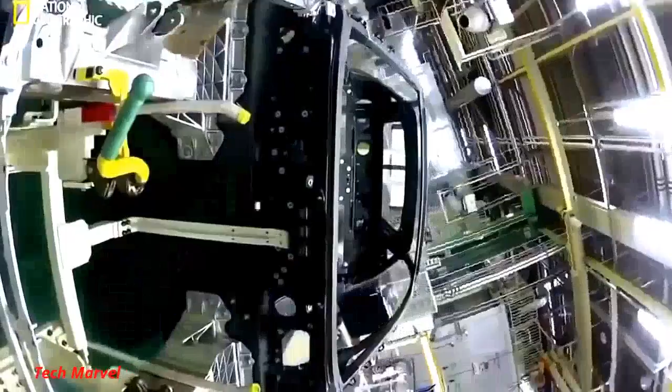In a top-secret megafactory, a car like no other is taking shape. Craftsmen hand-build what they consider an automotive work of art. Money is no object—this machine must redefine a billion-dollar brand. Failure is not an option.

Japanese marque Lexus sells itself on luxury, marketing its cars as elegant, quiet, high-tech, and efficient. Now, a different kind of car wears the Lexus badge, the LFA—aggressive, loud, agile, with the highest revving V10 engine in a production car, reaching 325 kilometers per hour. A car like nothing Lexus has ever produced before.

Lexus is just over 20 years old. The world's largest car maker, Toyota, created the brand to compete with other high-flying luxury marques: Mercedes-Benz, BMW, and Jaguar. It's worked—Lexus is now one of the biggest-selling high-end marques in the United States. But now, Lexus is out to inject more excitement into their brand.

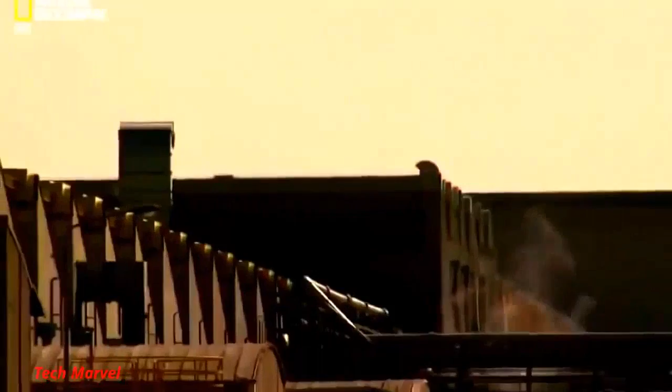The company transformed two unassuming blocks of this megafactory to create the LFA. They then scoured Toyota's 50,000-strong Japanese workforce to handpick just 175.

All the associates here at the LFA Works feel they are artisans, not just operators. These artisans are known as takumi, Japanese for craftsmen, a status only conferred on the most highly trained, skilled workers. Each and every associate at the LFA Works is seeking to achieve perfection, taking this challenge on with a sort of samurai spirit.

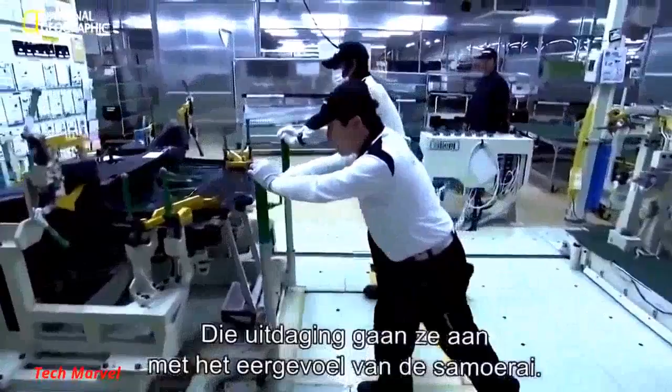Yamanaka Shigeru is manager of the LFA Works. His teamwork credentials come from another time-honored Japanese tradition: baseball. Before this, I was working as manager of the Toyota Motor Corporation baseball team, which brought people together from lots of different backgrounds. It was because I could manage that organization that I've been made manager here.

To reach their goal, they're turning to sophisticated tools and materials to build the car. The most important of these is carbon fiber composite. Carbon is crucial to the car's performance—it's a material five times the strength of steel, yet a quarter the weight. It's the construction material of choice for both Formula One racing cars and the aerospace industry.

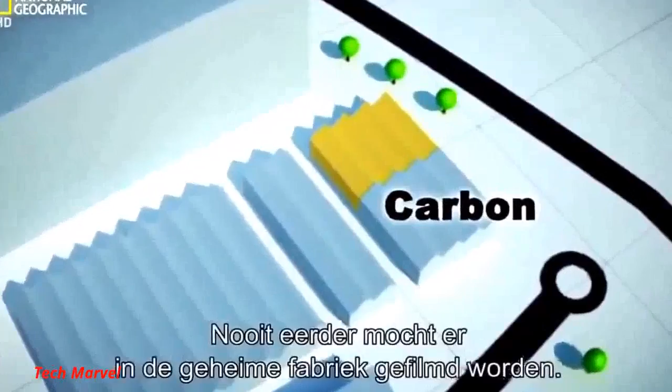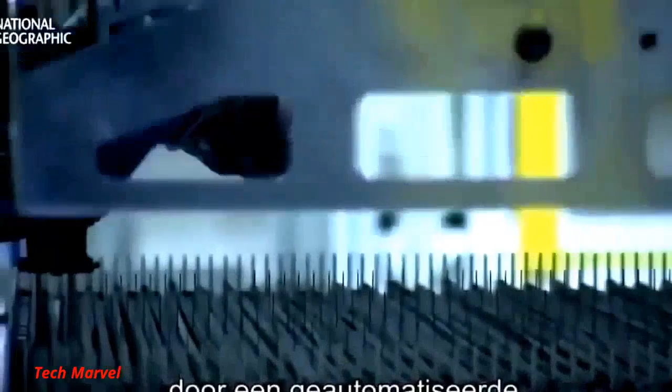The company even makes their own carbon fiber here on site. Up until now, no television cameras have ever been allowed inside this top-secret facility. First, simple strands of carbon fiber are woven into a pliable cloth using an automated weaving machine. This fabric is then transformed through heat, pressure, epoxy resin, and labor-intensive techniques into the car's core, known as the tub.

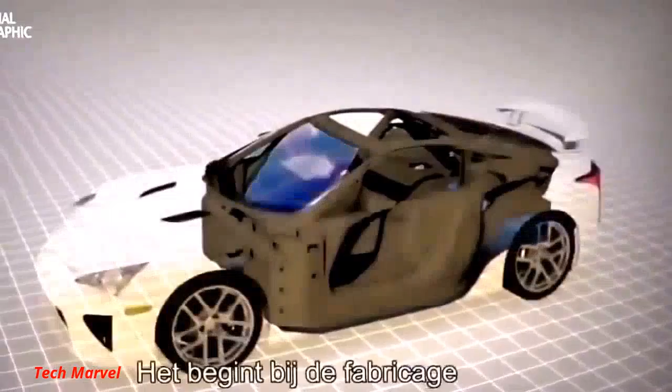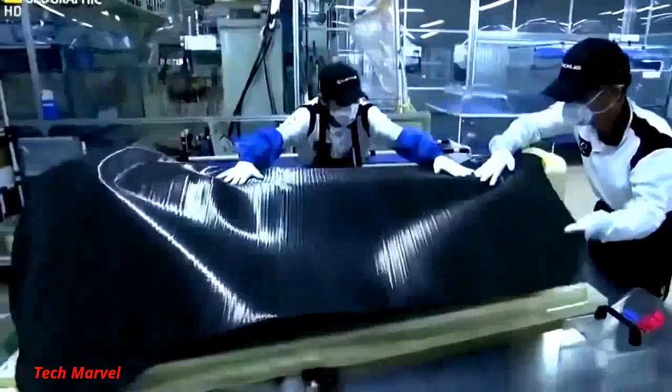The tub is pieced together like a 3D jigsaw. It starts with the construction of the floor. To make it, precisely cut carbon fiber cloth is lifted onto a mold. Next, skilled takumi smooth the supple fabric over the mold—this one is for the transmission tunnel that will house the drive shaft and exhaust.

In very complex areas like this, the fabric inevitably becomes frayed and not very neat. The associates work with these areas as if working with silk, taking great care every day. They also wear masks to avoid breathing in the hazardous fibers.

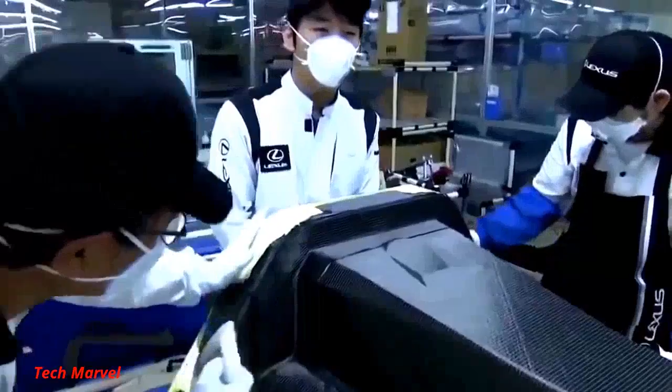In the beginning, the associates found it very difficult to work this material. It was much easier when they used an iron.

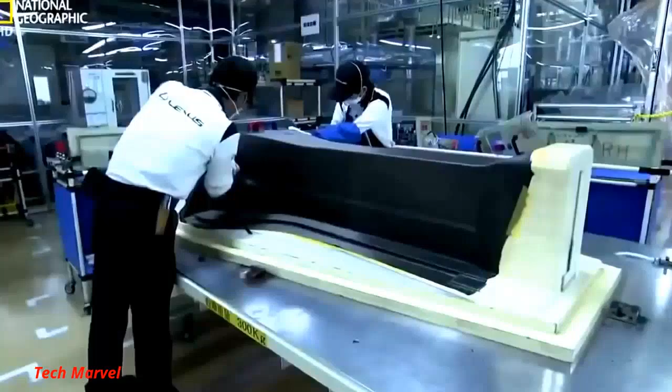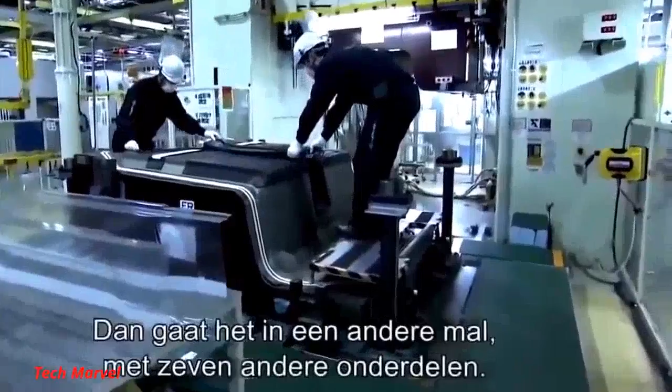The completed part is grill-heated to set its shape. It's then fitted into a template, along with seven other floor parts, and inserted into a 1,000-ton press. A glue-like resin is pumped into the template, and the whole section is then baked for eight hours at 130 degrees Celsius. Under this pressure and heat, the resin sets hard, binding the individual parts together to produce the car's floor panel.

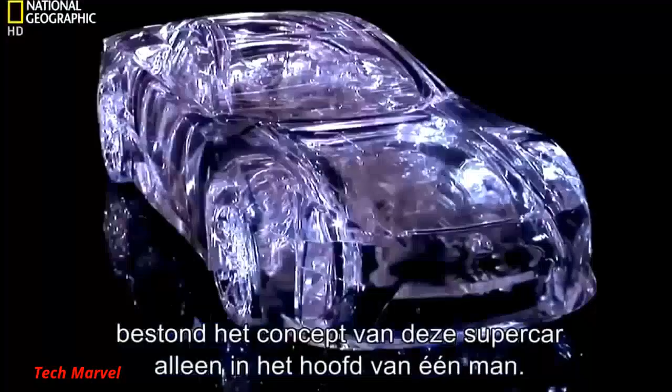Back in 2000, the concept of a world-beating supercar only exists in one man's head. At the company, I talked to just a small group of people at the top, not expecting anything, and they said, go ahead and try. With permission to proceed, Tanahashi gathers a team of engineers around him, and they start to make the basic engineering decisions. In the beginning, we planned to make the body from aluminium.

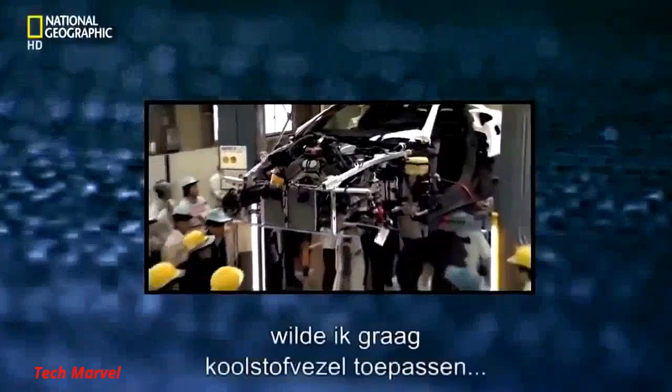But Tanahashi is fascinated with the possibilities offered by carbon. Developing a supercar, a super sports car, carbon fiber was a material I really wanted to try using, if at all possible. But this wonder material has its drawbacks. It's expensive, and the company has never used it to build any of their cars before.

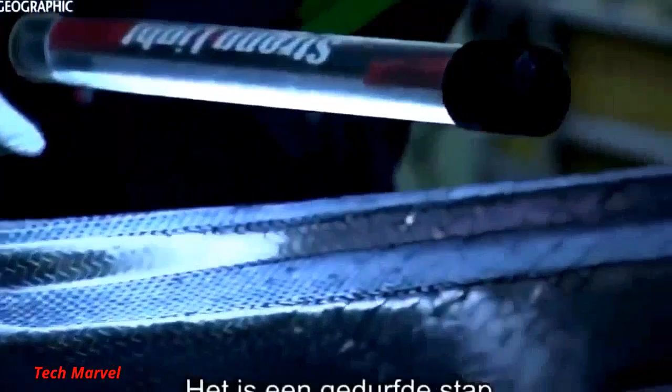Despite these significant challenges, Tanahashi gets his way. In 2005, my boss said, why not go for carbon? Slapping me on the shoulder. And I made the decision to go for carbon then. It's a bold step. Everyone involved with this project must master a material they have no experience with at all. It was the first time the workers had touched carbon, and everything about it was difficult for the workers.

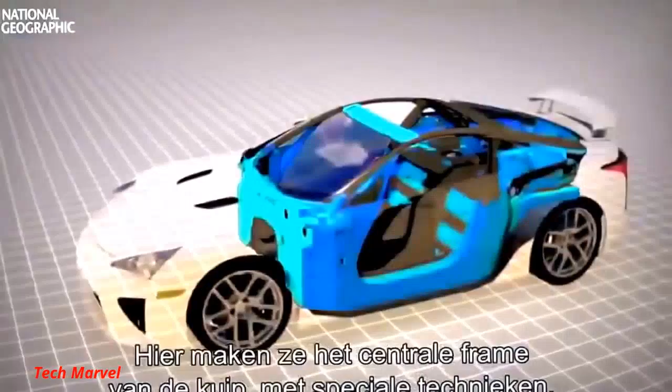In the state-of-the-art carbon fiber facility, the Takumi are returning from lunch. They vacuum themselves down to remove any foreign particles before entering a highly confidential sealed room. Here, the majority of the tub's central frame is created using the most intricate techniques.

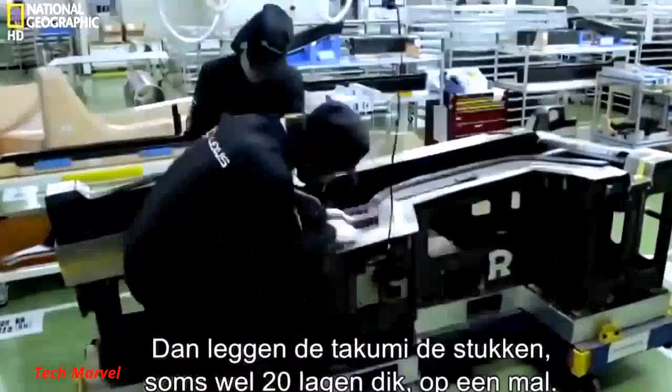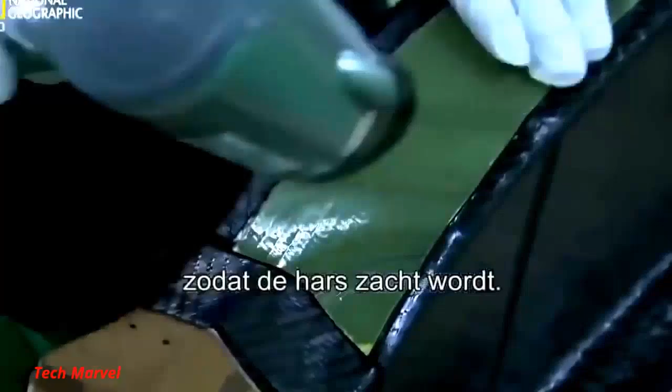In this process, an automated laser cuts out hundreds of individual shapes from carbon fiber cloth that's been pre-impregnated with a sticky resin. Next, Takumi layer the cutouts, up to 20 sheets deep, onto a mold. This one will make the right side panel. The associate uses a dryer to raise the temperature of the laminate and half melts the resin as he applies it. The tacky cutouts stick to each other and any gaps are squeezed out using a vacuum bag that forces them together.

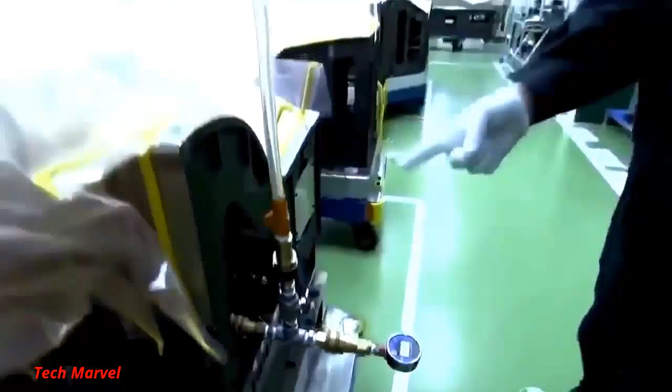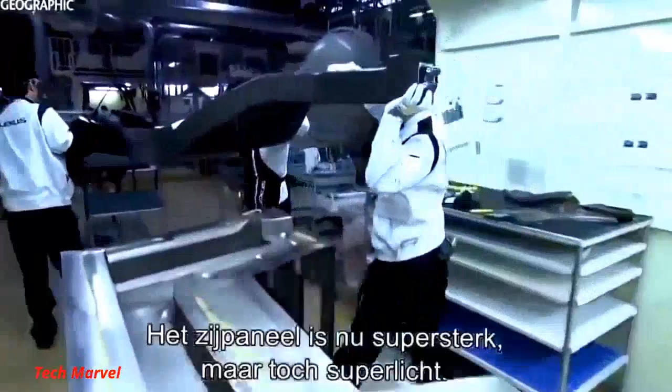The shrink-wrapped side panel is then wheeled across the works and loaded into a pressurized oven. Baking overnight at 150 degrees Celsius sets the resin, resulting in a side panel that's both ultra-strong and ultra-light. An aluminium equivalent would be twice as heavy.

Weight saving is the holy grail for all auto engineers. Less weight and more power leads to increased acceleration, and speed defines a supercar. The body of the LFA is 65% carbon fiber, helping it accelerate from 0 to 100 kilometers per hour in 3.7 seconds. If made of aluminium, it will be 100 kilograms heavier, like having a sumo wrestler in the passenger seat. As it is, this car weighs just 1,480 kilograms all in.

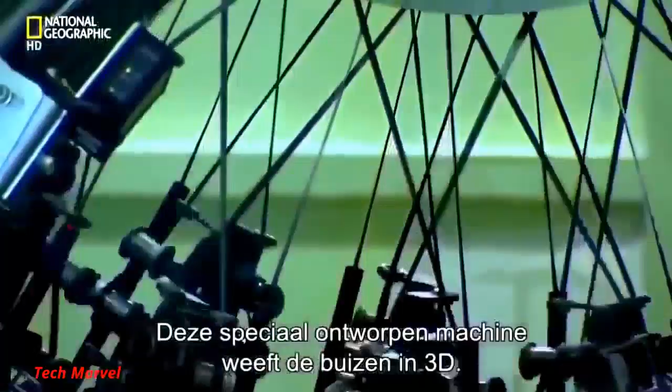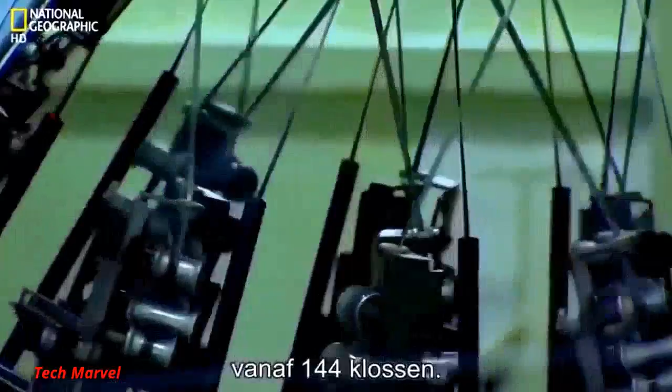Back at the factory, in a locked room, a bespoke machine creates two crucial parts to complete the tub's construction. The roof rails support the windscreen, as well as protecting the driver if the car rolls over. This custom-built circular loom weaves the carbon rail in 3D. It uses lasers to control the feed of carbon fiber strands from 144 bobbins. These knit the carbon around a top-secret automated template that's fed through the center of the loom. This is done twice over to cross-hatch the carbon weave, so giving the rail its strength.

The whole mechanism has its own control box, and for good reason. If something goes wrong, even a little thing, the shape gets distorted immediately.

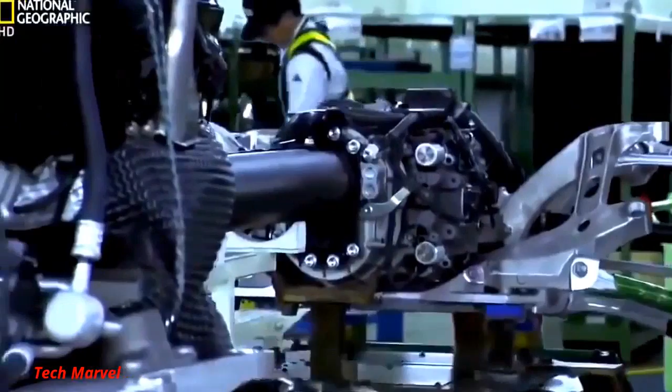The drivetrain comprises the transmission, torque tube, and last but not least, a 4.8-litre V10. The location of this engine is crucial to the car's entire concept. I wanted to build the car around the people in it. And for a supercar that puts people first, the optimum place for the engine is front mid. This front mid location puts the engine between the driver and the car's front wheels. With the transmission placed at the rear, the driver is in the center and the car feels balanced to drive.

The aim is to make the car's handling as good as possible. But a front mid configuration dramatically restricts the space available for the engine. Tanahashi has a problem. You need an engine of a certain size with a certain degree of compactness, but you want a high-powered engine as well. Tanahashi needs a small engine to fit in the restricted engine space, but he also needs the power of a large engine because power equals speed.

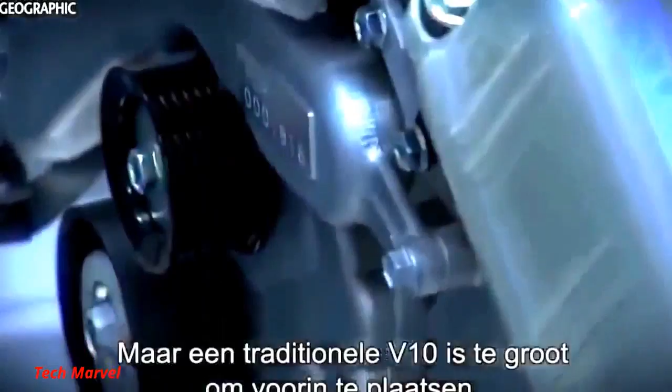And that isn't all. The high-pitched sound of Formula One makes you shiver, doesn't it? I really wanted to have that as part of the LFA. Only a high-revving V10 engine supplies this combination of power and sound, but a traditional V10 is too big for his mid-front configuration. Lexus have made nothing like this before. Their production line cars use 6- and 8-cylinder engines engineered for a super quiet ride. This V10 will be the opposite.

Tanahashi turns to some old friends for help. We are a motorcycle manufacturer. We understand power alone is not enough in a vehicle. For a sports car, small and lightweight is critical.

For almost half a century, Yamaha have worked with Toyota to create high-powered lightweight engines and cars. The legendary 2000 GT, star of the James Bond film You Only Live Twice, and Japan's first true sports car, was the first fruit of their collaboration.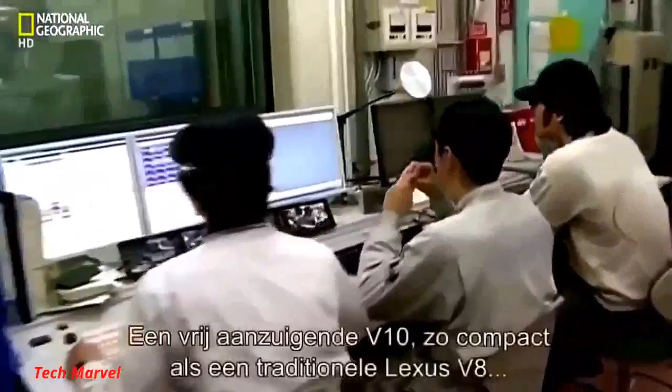Headed by Lexus engine guru Okamoto Takamitsu, the team sets itself an ambitious goal: to create a naturally aspirated V10 engine as compact as a traditional Lexus V8, with the weight of a V6. I wanted to create something different to any other supercar engine.

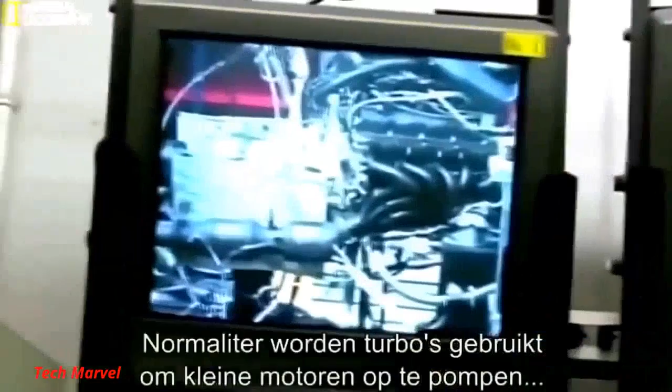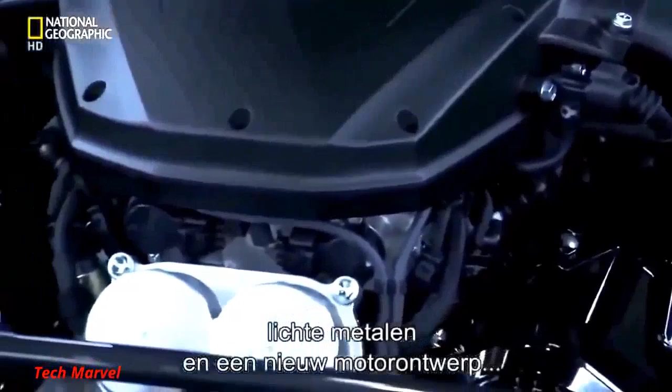Normally, engineers use turbochargers to boost the output of smaller engines to simulate V10 power. But turbocharged engines don't have the rapid response, acceleration or sound of a naturally aspirated V10. By using Yamaha's motorcycle know-how, the lightest metals, and redesigning the engine's guts, Okamoto creates a masterpiece of engineering - a non-turbocharged compact V10 that fits into a mid-front design while keeping weight to a minimum.

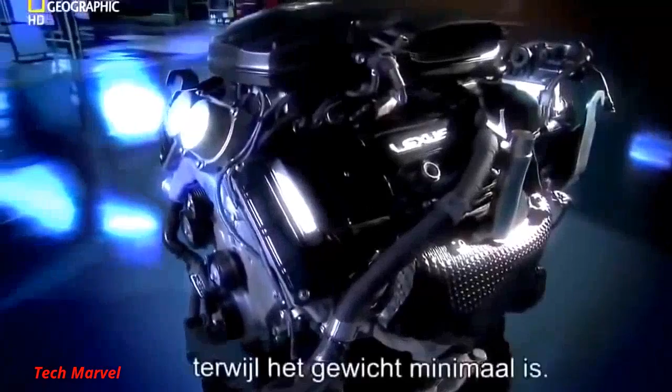The engine starts life in Toyota's Miyoshi plant as molten aluminium. It's cast in a 3D resin-impregnated sand mold made from 37 individual blocks that take a week to fashion.

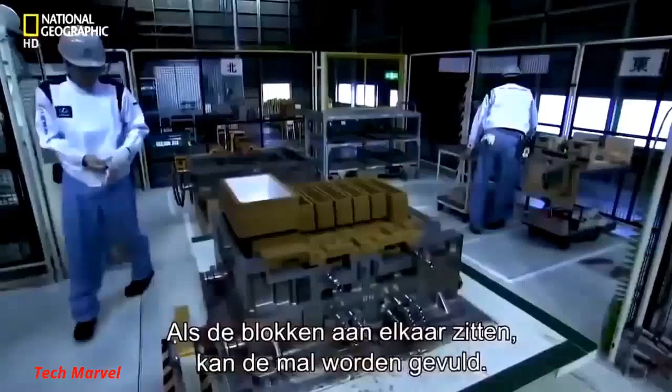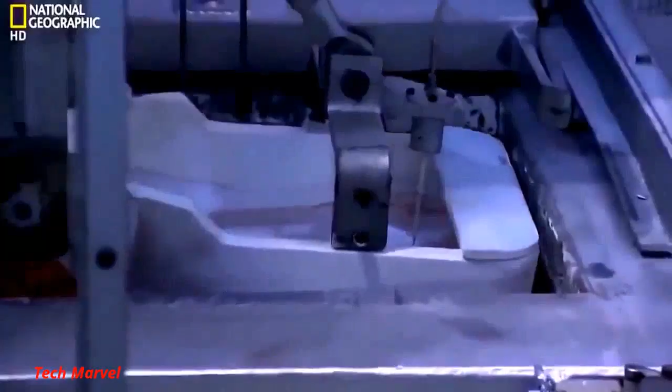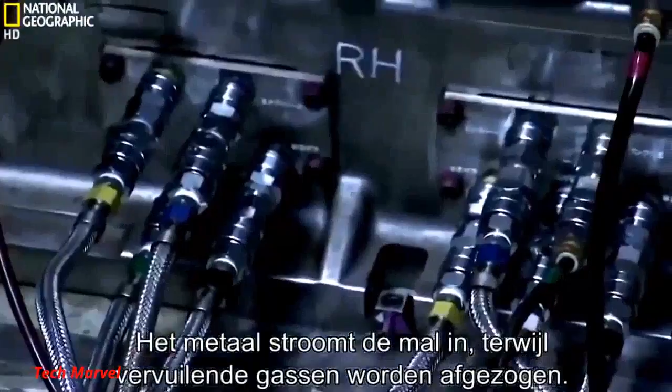With the blocks fitted together, the mold is ready to be filled. At 750 degrees Celsius, impurities are scooped off the top of the molten aluminium. The liquid metal flows into the mold as a vacuum sucks out any contaminating gases. Two hours later, with the metal set, the sand is hammered off to reveal the solid aluminium engine block inside.

It's off to Toyota City's Honsha factory and the company's highly confidential Formula One engine facility. These works are always off limits. We're going to go in.

Ready? Come in. Television cameras have never been allowed in here before.

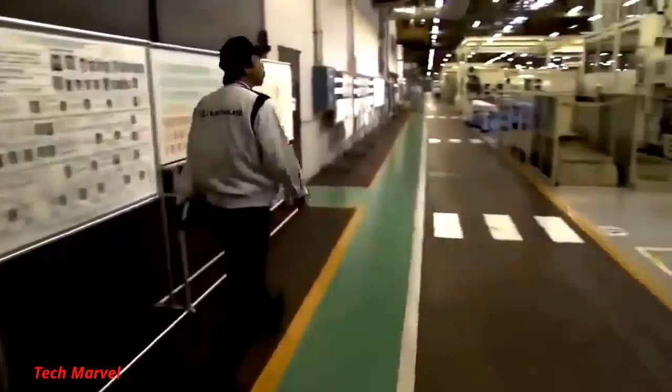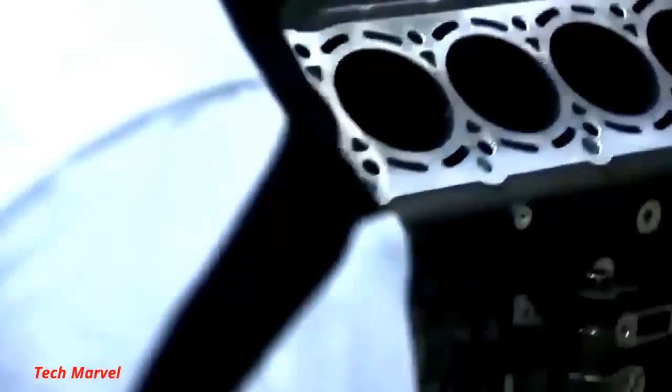For a decade, Toyota spent big competing in Formula One racing. But without a win in 139 races, they withdrew in 2009, leaving this state-of-the-art facility idle. For the LFA team, it was too good an opportunity to miss. The close parallels with F1 engine technology make this milling facility a ready-made fit.

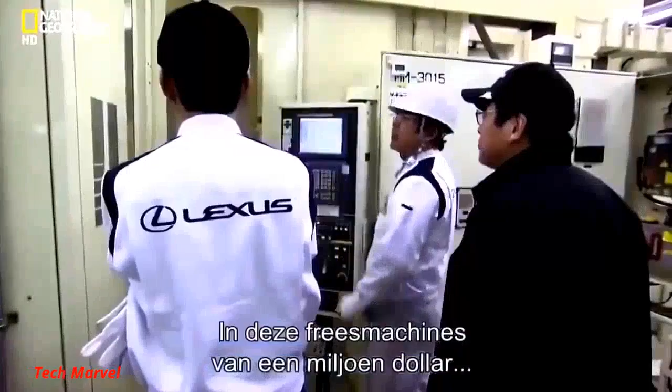In these million-dollar automated machining tools, the rough engine casts are milled, drilled and polished before emerging as precisely spec'd engine blocks.

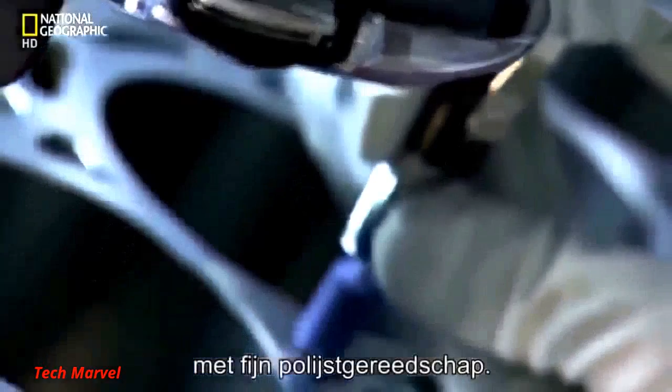Then the robots hand over to humans. In a sealed room, Takumi hone every sharp edge using precision polishing tools. Finally, a highly skilled Takumi pre-assembles the finished engine blocks to check they fit precisely. These blocks and heads are paired for life.

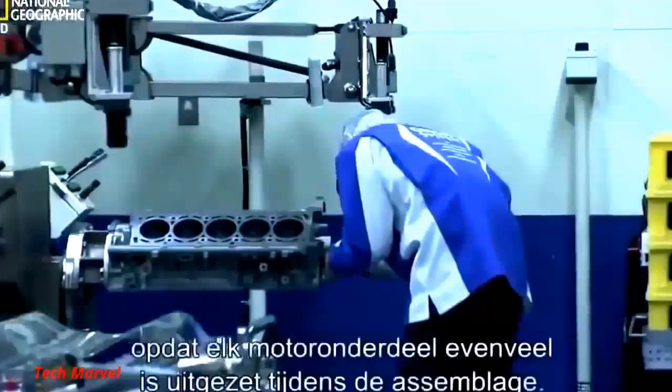Disassembled, they travel as a unit to Yamaha's Iwata city plant, 90 kilometers southeast of Toyota City. The engine room here takes obsession to new heights. As you'd expect, hairnets and airlocks prevent any particle contamination. But the room is also kept at a constant temperature and humidity to ensure that every engine part is at the same state of thermal expansion during assembly.

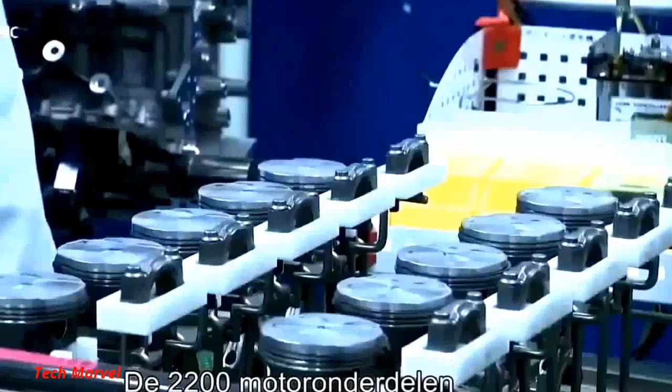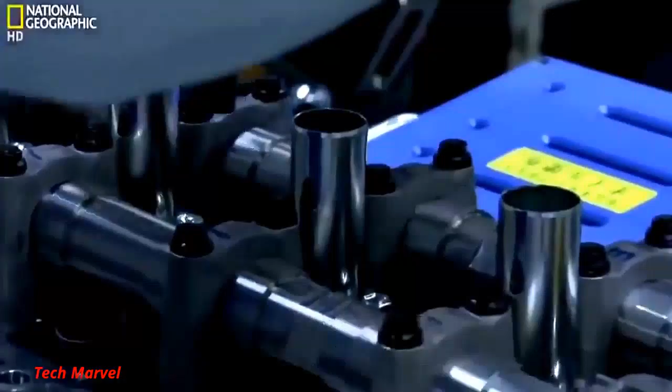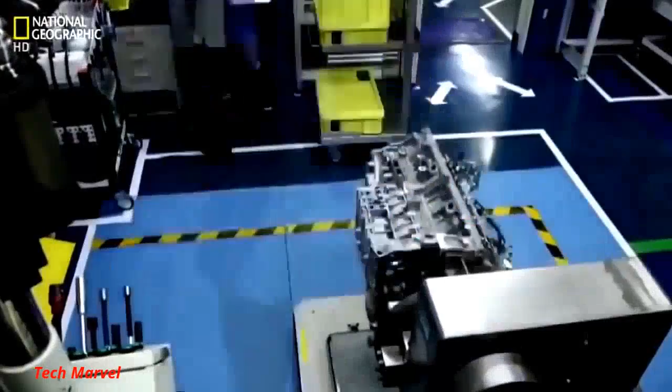This is more laboratory than workshop. The 2,200 engine parts are divided into 61 different kits for assembly by number. Each hand-assembled engine bears the Takumi signature.

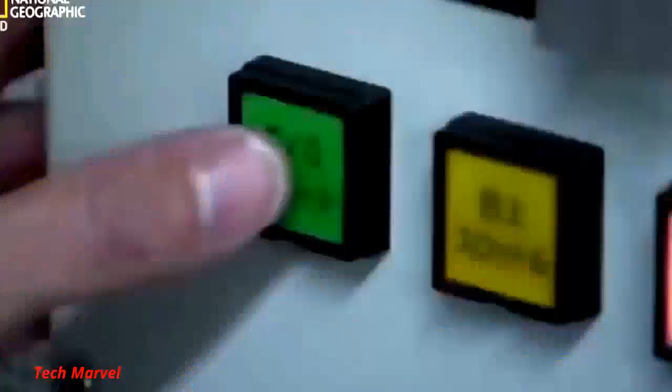Before this masterpiece goes anywhere near a car, it undergoes a half-day of exhaustive testing in the room next door to engine assembly. The resulting 4.8-litre engine is so responsive that it takes just half a second to reach 9,000 RPM.

That means instant acceleration, whatever gear you're in. This engine has excellent response and more RPM than any other commercially available engine. Response time is so fast that a digital rev counter is the only unit able to keep up. And the sound of this high-revving engine is unmistakable. The sound of the LFA is unique, and once heard, never forgotten.

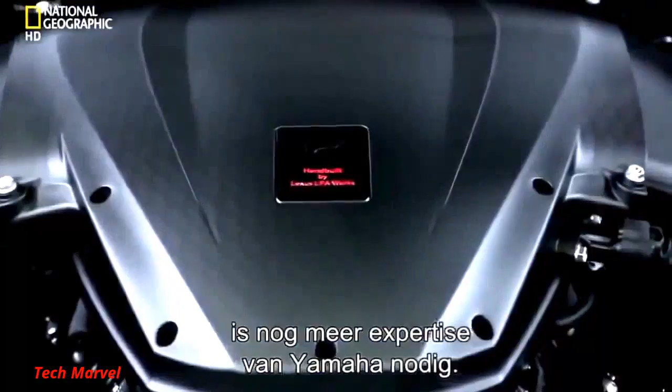To achieve the engine soundtrack that Tanahashi insists upon requires more of Yamaha's specialist knowledge. We are a manufacturer of musical instruments, so when it comes to sound technology, we have a certain level of know-how.

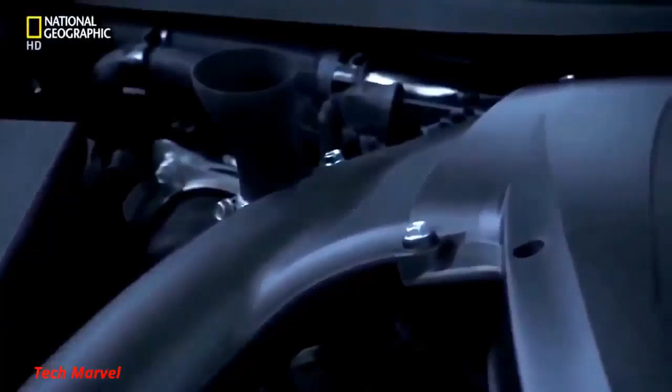Honji Yoshikazu is obsessed with sound. I think the relationship between a super sports car and its driver is like the relationship between a top musical performer and their instrument. When they play in a certain way, they can listen to that sound and use it to produce another, better sound.

Critically, a car has two different sound characteristics. One sound is the exhaust. You can call it an iconic sound. Just by hearing that sound, you know which car it is. The other, which we were particularly concerned with, is the sound heard by the driver.

To refine the driver's soundtrack, Heiji Maruyama, general manager of Yamaha Motors, had to redesign the component that sits on top of the engine, called the surge tank, by turning convention on its head. The function of the surge tank is to send air equally into all 10 cylinders. Normally, techniques to reduce noise from the intakes are used. We thought to go the other way and use it to amplify the sound, to communicate it to the driver.

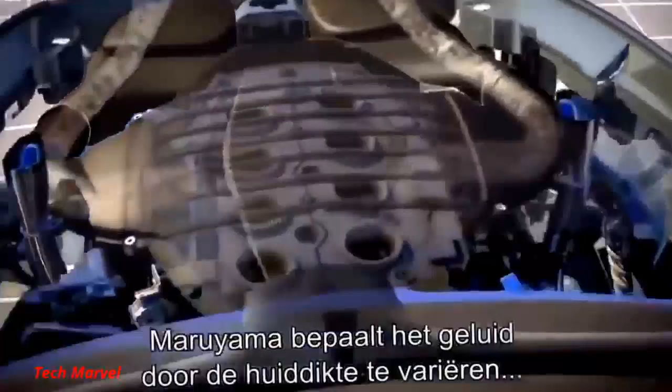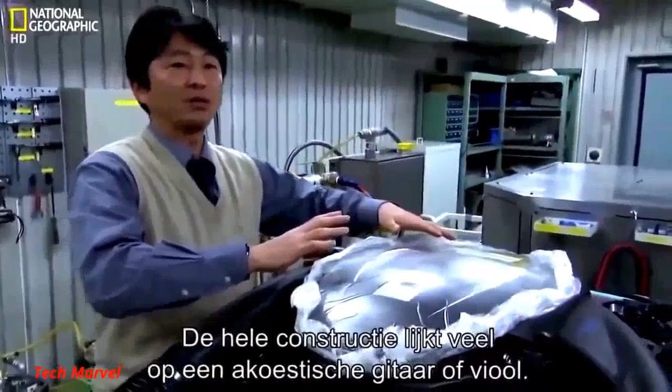Maruyama tunes the chamber by varying the thickness of the surge tank's upper surface and adding internal vibrating ribs. The construction is very like that of an acoustic guitar or violin. The team channels these good vibrations back into the cabin using sound passages.

We use these to send low-pitch sound to the driver's feet and higher frequency sounds through at ear level. The driver is in the middle of this dynamic surround sound system.

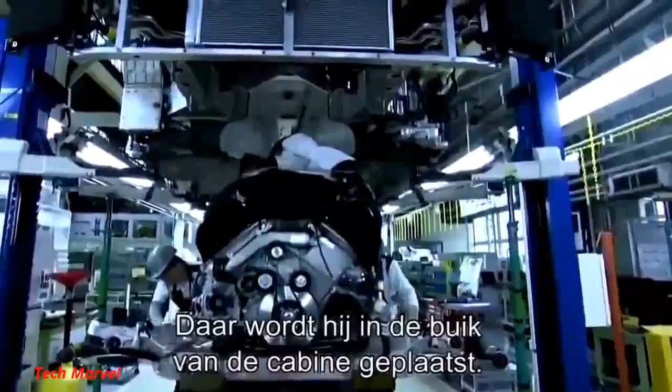The completed engine is forklifted onto a waiting truck for shipment back to the LFA works. Here, as part of the assembled drivetrain, it's inserted into the cabin's belly, guided only by eye.

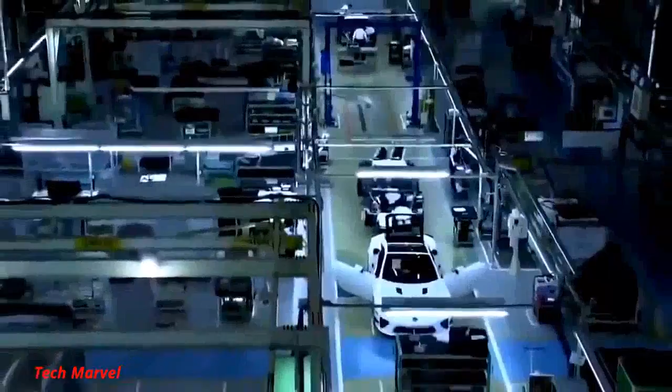With the guts of the car in place, it's time to feed them. An automated pump injects engine oil, brake fluid and coolant into the appropriate underbonnet opening.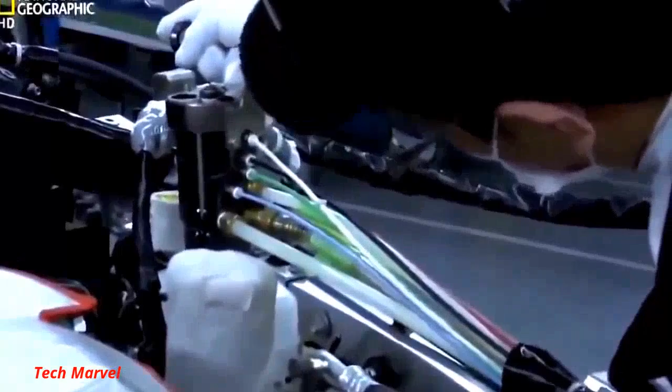In Japan, machines play a tune to alert anybody nearby that they're running. This one plays an American folk song. With the precise volume of fluid added, the pump stops, as does the music.

The car's 9 moulded glass fibre body panels are manufactured off-site. This material is both strong and light, but far cheaper to replace than carbon fibre, should the car crash.

The paint shop is under the same roof as assembly, but it's a very different world in here.

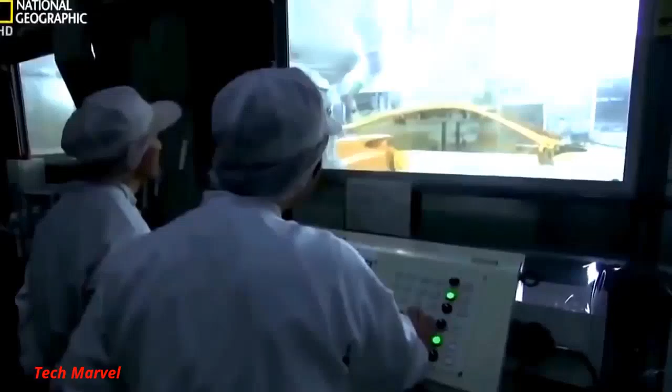At the LFA works, paint is one of the few production processes performed by robot. The company believes they give a more consistent finish.

But there's always an ongoing human battle in the paint department. Dust is the greatest enemy for painting. If dust gets into the paint surface, when it's heated, the dust swells up and causes a blister.

So the atmosphere is controlled on a daily basis, and there's a strict dress code.

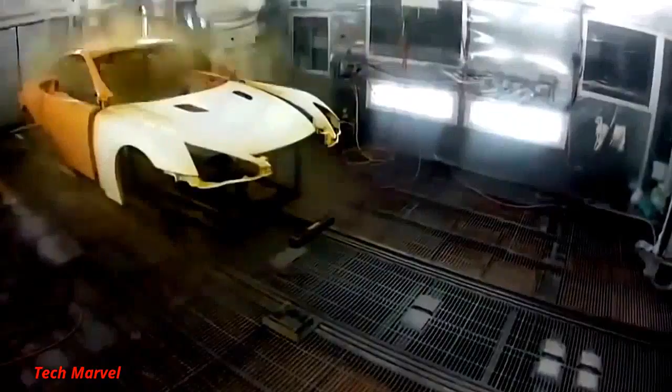Up to 5 layers of paint are applied. And where robots can't reach, humans can.

Job done. The sprayed panels are dried in an oven at 100 degrees Celsius for 50 minutes before being wheeled out for inspection.

The battle against dust continues, with water nozzles spraying a fine mist into the air to stop anything drifting onto the pristine surfaces.

A bright light inspector spots any blemishes and marks them up to be polished out.

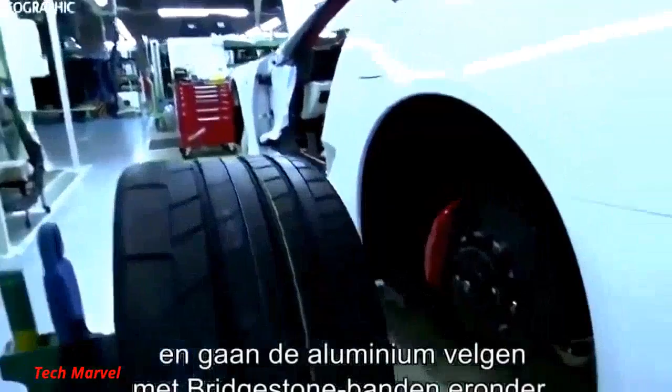The completed panels are wheeled out of paint across the factory floor and attached to the carbon tub back in assembly at the 3rd position on the line, known as final. Here, the hand-stitched leather interior is installed, and the forged aluminium wheels with bespoke Bridgestone tyres are also fitted.

It looks as if the associates are performing each task very slowly, but every one of them is working very carefully and with a high degree of certainty. If you compare it to a sport, they are top players who complete a successful play every time.

The LFA works runs like clockwork, yet there's no clock watching.

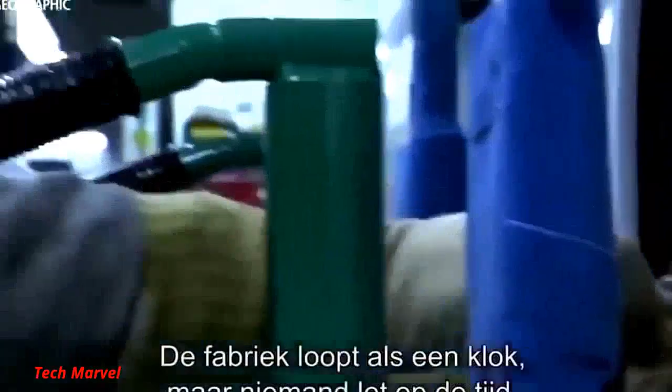The reason why there is so much time is that Chief Yamanaka tells us to take our time and work slowly so that we can make something that we know is good. How can I put it? He says that in order to ensure quality, we can take as much time as we need.

That goes for overtime as well. If it means we make something good, then we can do overtime.

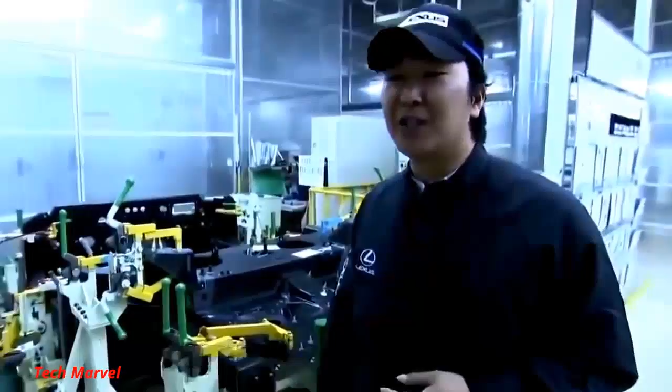The only stipulation is that one car must drive off this assembly line every day. And from the beginning, Chief Engineer Tanahashi was clear that only 500 would be built. At a car a day, that will take just 2 years. And then, this factory will close.

Making only 500 cars positions the LFA as a very special car. There is no plan to make any more at all.

Even pricing the LFA at $375,000, the most expensive Japanese road car ever, a limited production run isn't going to recoup the costs of development, the use of cutting-edge materials, and unlimited overtime.

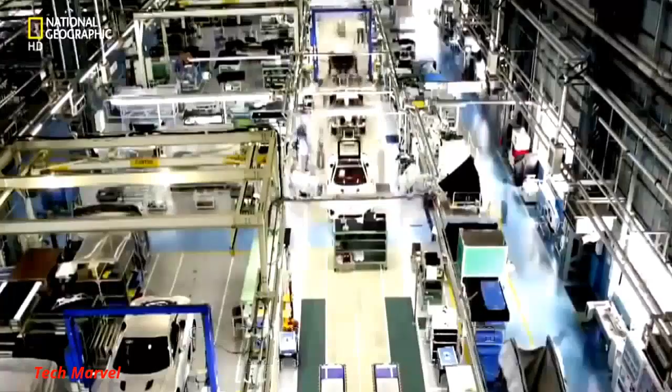I think it will be difficult to make a profit with only 500 units delivered. But by producing the LFA, the Lexus brand gains in value and is well received worldwide.

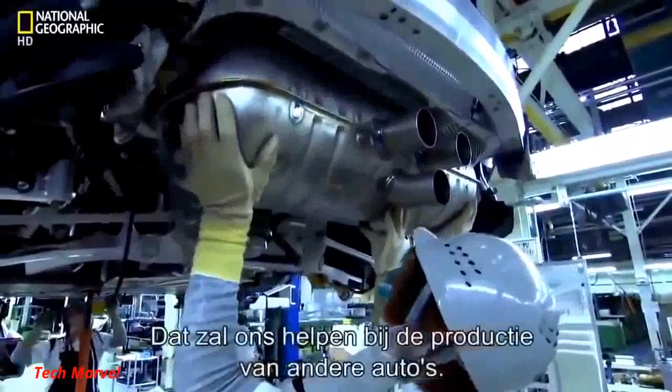I think the legacy will be left in technique, knowledge and teamwork for making cars that will please our customers in the future.

Back in 2004, with the prototype build, Chief Engineer Tanahashi takes a bold decision. He wants the car proved on the severest of tracks. Nothing in Japan fits the bill, so he takes the entire development team to the notorious Nürburgring in Germany.

For us car makers, the Nordschleife on the Nürburgring is like a mecca for cars. This is where this car was honed.

The 20-kilometer Nordschleife section of the Nürburgring is infamous as the world's most punishing test track. For 4 years, the team tests every aspect of the car's engineering around the Nordschleife's dips, jumps, relentless corners, and flat-out straights.

The car's development makes progress towards its production deadline, but Tanahashi wants to fast-track its fine-tuning. In 2008, he throws it into the unforgiving world of racing and enters the Nürburgring 24-hour race. It was purely to get more feedback on the production type LFA and to improve it under real race conditions.

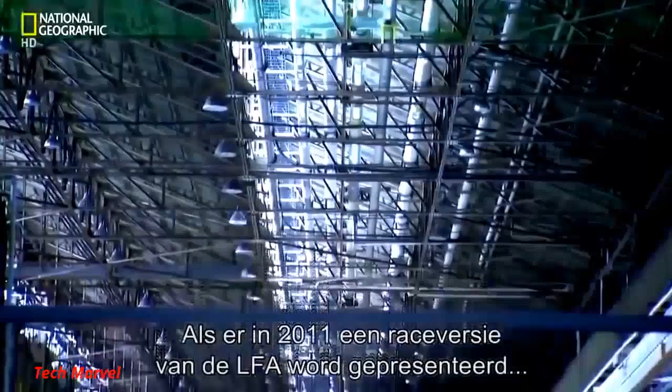The brutal experiment works. A year later, the revised car wins its class. Tanahashi is finally happy, and in 2010, the LFA goes into full production. When in 2011, a special race edition of the standard LFA is launched, its name pays homage to the racetrack that forged it. It is with thanks to that sacred place that we called it the Nürburgring package.

This Nürburgring package has a retuned engine which pumps out 571 horsepower, 11 more than the standard engine. This extra power requires more downforce to keep the car on the track, so the rear spoiler is larger and fixed.

Left and right canard fins on the car's front bumper also increase downforce. The stiffer lower suspension makes it more suitable for a life on the track. Finally, to increase acceleration, the computerized transmission is upgraded to change a split second faster.

It all adds up to a Japanese supercar. Only 50 will be built, each with the price tag $70,000 more than a standard LFA.

Back at the LFA works, in assembly's last position, the wheels are aligned to ensure the car handles perfectly. After 3 days in assembly, the car officially moves to inspection. The inspection process involves 7,000 separate checks.

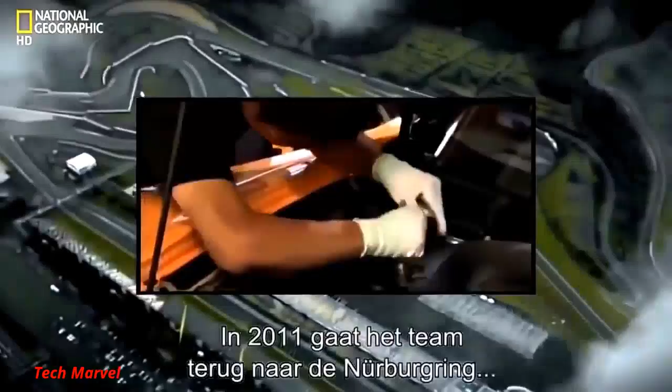In 2011, the team reassembled at the Nürburgring to put the car into the record books. They're out to beat the fastest official time by a road-registered production vehicle. This is the chance for the Nürburgring package to prove its pedigree.

With test driver Iida Akira behind the wheel, the team held their breath. I pushed the car on every corner. There are over 150 corners, driving very aggressively, but at the same time, I enjoyed it.

To beat the record, Iida must average 167 kilometers per hour over the track's 20 kilometers. I had no concept of the time when I crossed the finish line.

Seven minutes, 14 seconds. The fastest official time by a production car not using slick race tires, and the 5th fastest time ever. It was an unbelievable moment. It's one of the best moments of my life.

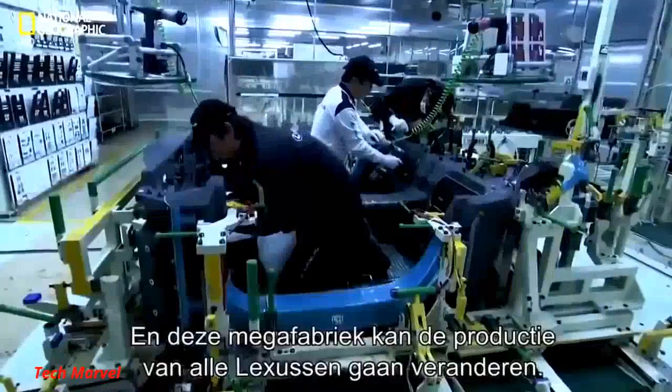And this mega factory could redefine how all Lexus cars are built. We took on all kinds of challenges, and there were new production needs. I look forward to seeing the outcome of these, both visible and invisible, in future cars.